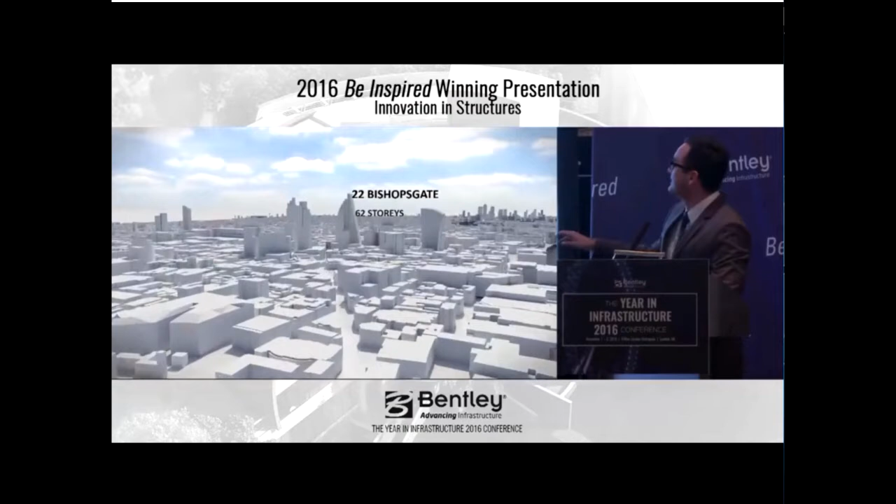Let's hope this works, it's a little video. So as we fly from Waterloo Bridge to the City of London, that gap between the Gherkin and the Heron Tower, between the Cheese Grater as well, that is where Bishopsgate is going to be.

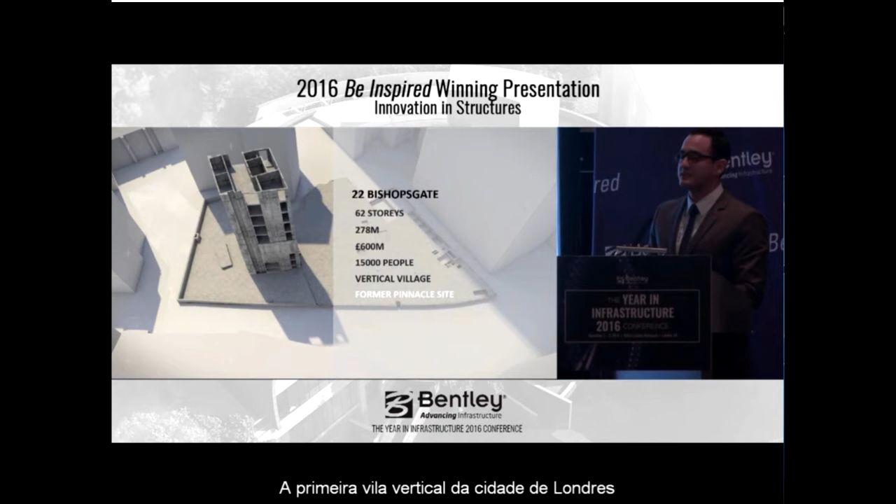It's a 62-story building, it's going to be 278 meters. The cost of the project is £600 million, and it's going to host 15,000 people. It's possibly the first of its kind in being a vertical village in the City of London, providing shopping space, amenity spaces, and office spaces as well.

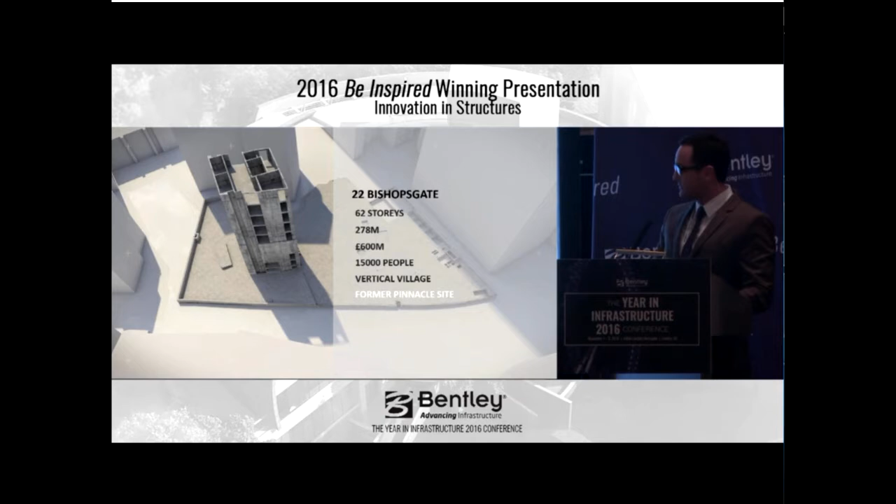The interesting thing about this project was that it is going to be built on the site of a previous building, the Pinnacle. Before that, we had 38 Bishopsgate, a building that was affected by one of the bombs a few decades ago, a terrorist attack. On that site, the Pinnacle was going to be built. This was before the recession in 2008, 2009, and the building, unfortunately, was only built up to level 7, the core of the building. I say unfortunately because I think, personally, that it was a beautiful design.

And now it's going to be replaced by another fantastic design, this time much more efficient, much more true and honest to the current economical situation.

What were the challenges? Well, the site constraints, as you can see, is in the middle of many, many towers. The City of London has very stringent and demanding planning requirements as well. Program constraints, everyone wants to build the towers as soon as possible. But also, unfortunately, the Pinnacle wasn't built, but also, unfortunately, it was built, because we were left with 3 stories of basement in the ground that we had to reuse for a completely different building.

A foundation built like this, and a building like that. So our challenge was trying to marry the superstructure, which didn't correspond to where the foundations were. So we had existing Pinnacle basement, existing Pinnacle foundations, and pre-existing Pinnacle foundations as well. And of course, we had to always provide a super efficient design, regardless of all the constraints. So I would like to take you through all of the elements of the building, and hopefully we'll get a glimpse of what the challenges were as well, and how we used Bentley software to overcome these.

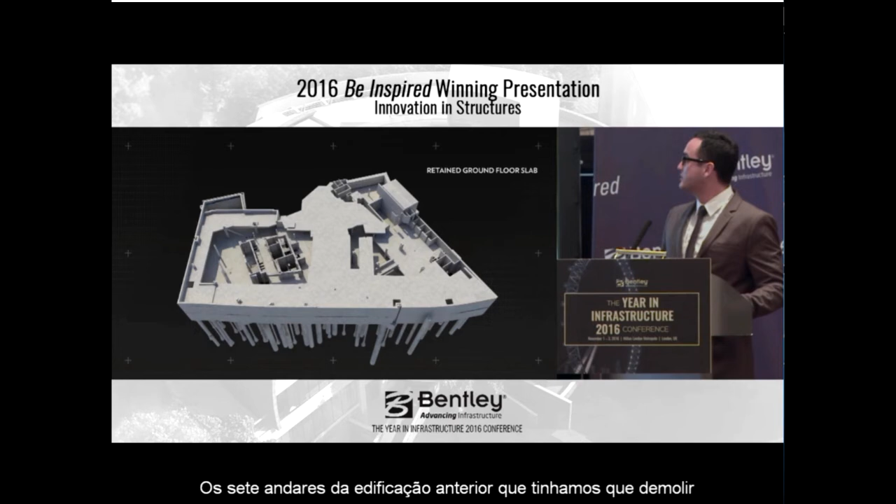So that is the existing site. I'll talk you through demolition and enabling works. What you see there is the stump, nicknamed the stump, the 7 stories of the previous building which we had to demolish. At the same time, we had to demolish partially some of the existing basement, levels B1 and B2.

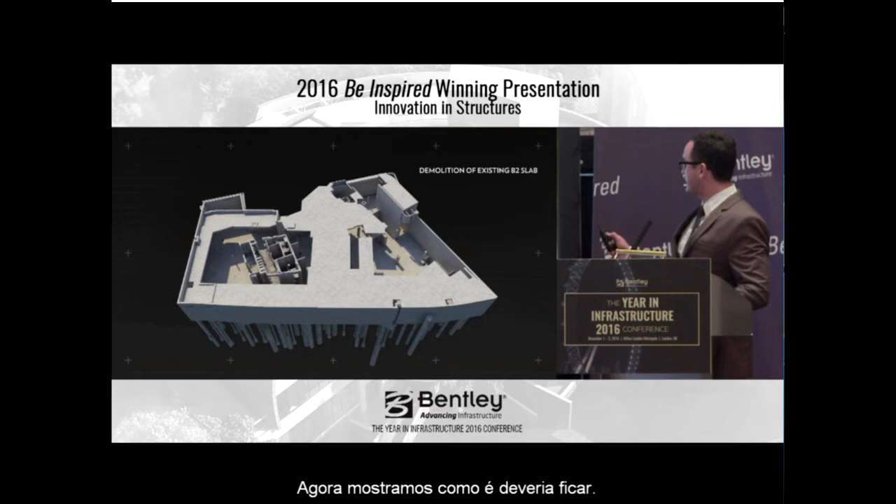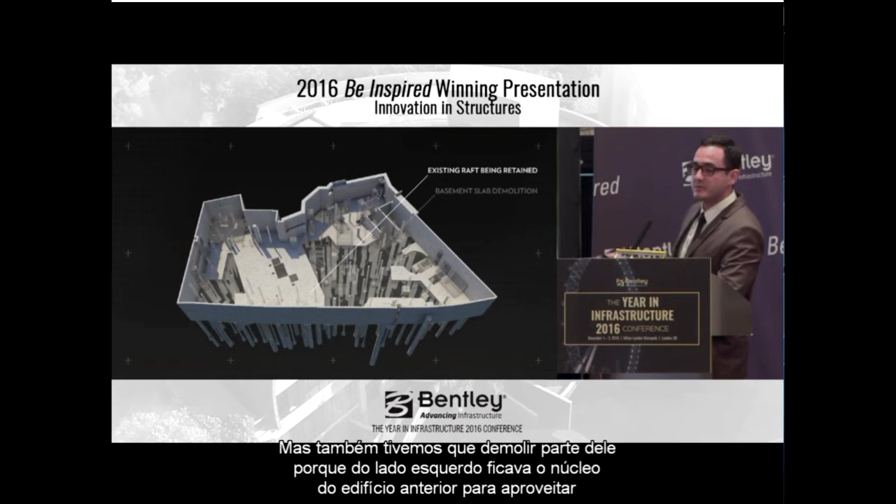Now I'll show you what the basement looks like without any of the slabs. So that is level B3, but also we had to demolish part of it, because on the left-hand side is where the core for the previous building would have gone. Now this building is much bigger, the footprint of the core is also much larger, so we had to provide additional foundation capacity on the right-hand side as well. If we spin this around, you'll see what the foundation looks like.

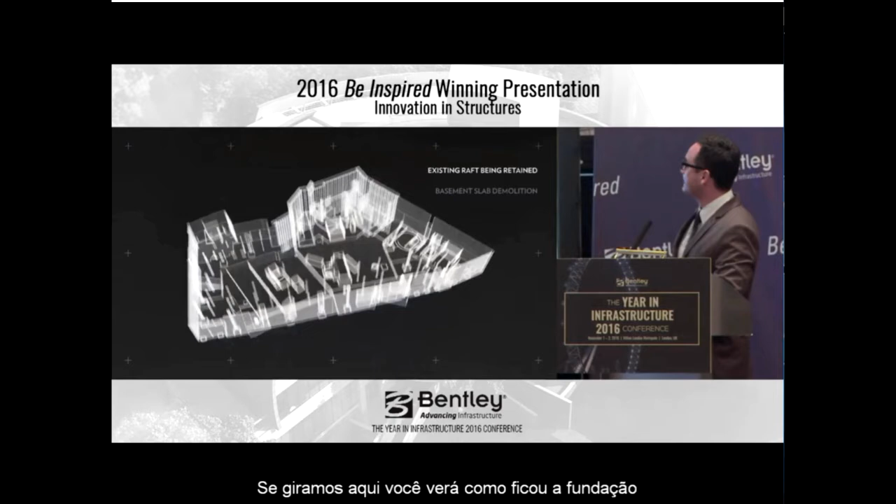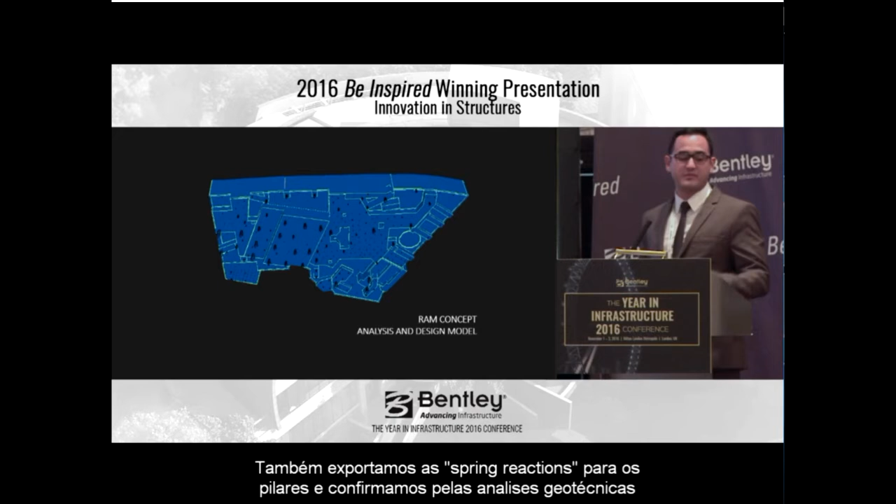So that's what it looks like. All the elements in grey are existing, and all the elements in blue are new. To analyze this interaction, we used RAM Concept, and we modeled all of the elements, existing and new, which is very complicated geometry. We also exported all the spring reactions for the piles from the geotechnical analysis, and tried to make them both compatible and interpret how the foundation was going to work. So I'll show you what the foundations actually look like.

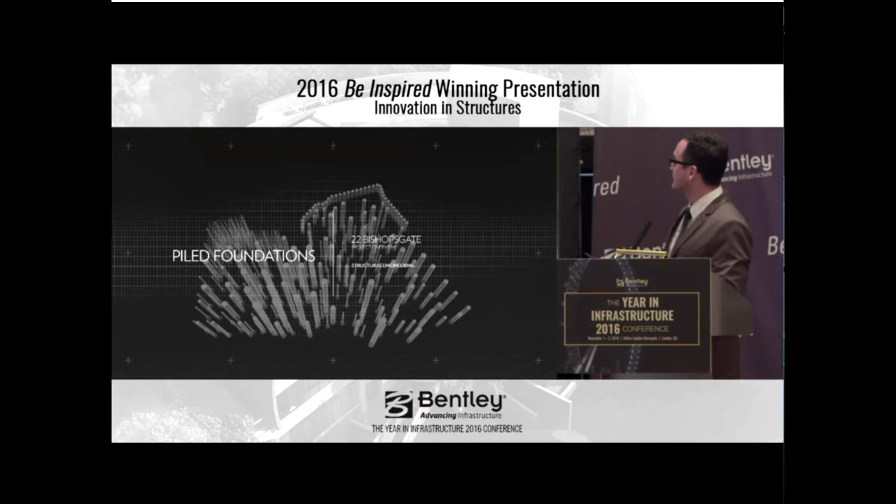Before they built the pinnacle, you can see all of the piles highlighted in blue, which are underlying piles supporting the inside the clay. These were for the previous building, 38 Bishopsgate.

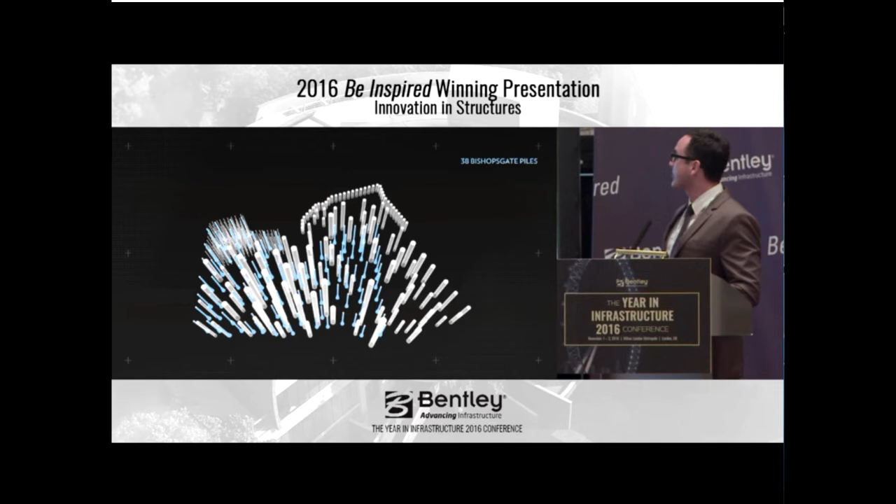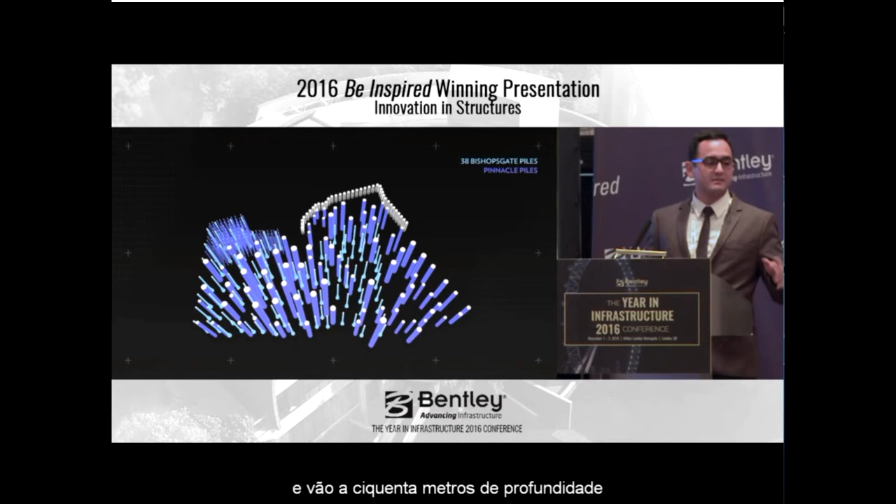When they started to construct the pinnacle, they built the new piles in dark blue or purple. Some of these piles are 2.5 meters in diameter and go 50 meters deep into the strongest strata, which is the Thanet Sands.

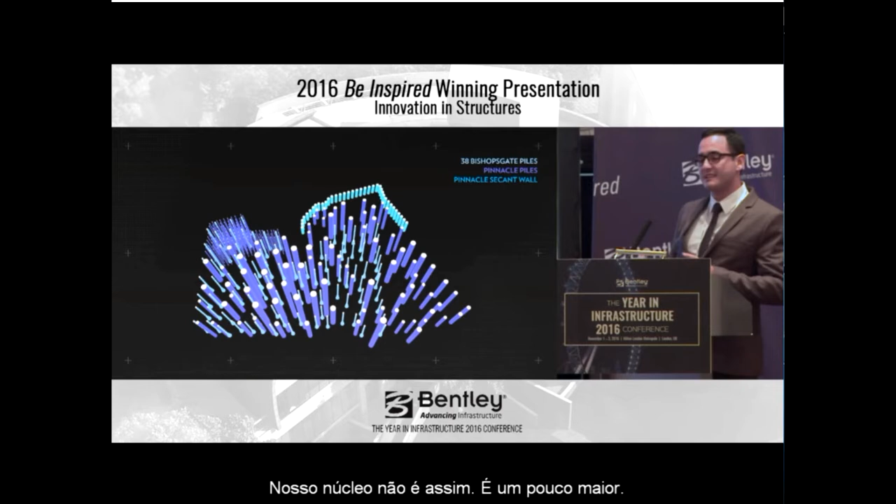As you can see, there's a concentration of piles on the left-hand side. That is where the core was going to be for the previous building. Our core is slightly different, it's a little bit bigger. The size of our core, overlaid there, corresponds actually not to the stability requirements of the building, but...

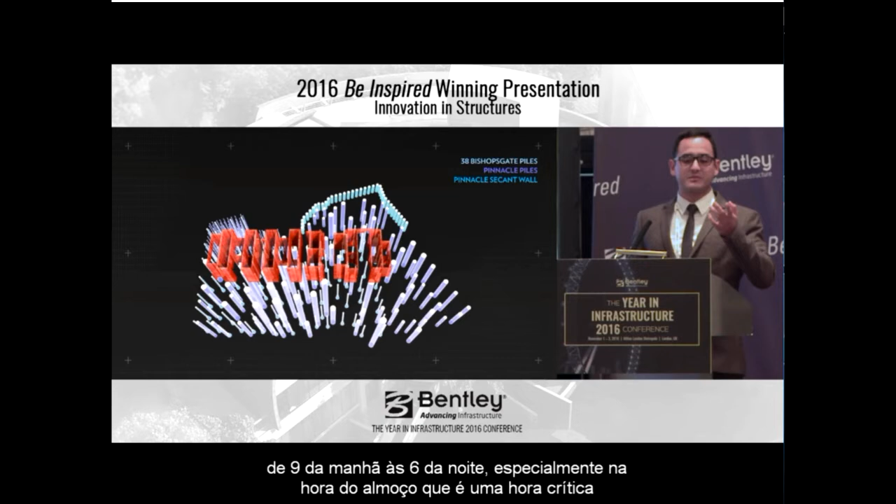...the number of lifts required to mobilize 15,000 people up and down, up at 8 in the morning or 9, and down at 6 p.m., but especially at lunchtime. That is the critical time.

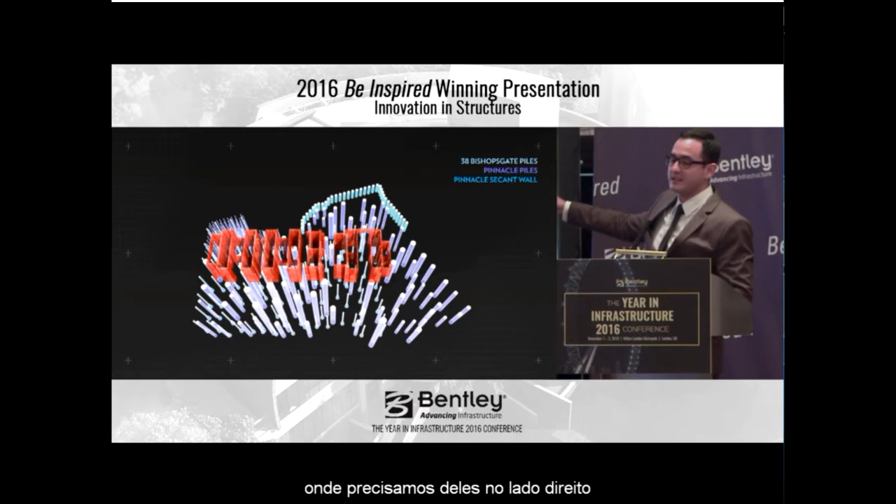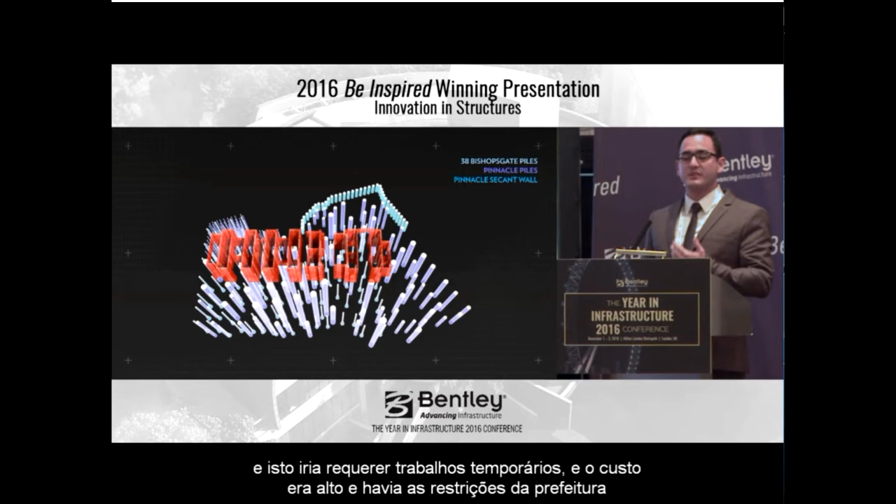So how did we manage to provide additional foundation capacity? The idea originally was to create or build 16 new 2.4 meter diameter piles where we required them on the right-hand side. But to do this, we would have required a rig from ground floor, drilling through 3 stories of basement, and then 50 meters into the sand, through the clay, to the sand. And that required temporary works, the cost was large, and there were also program implications.

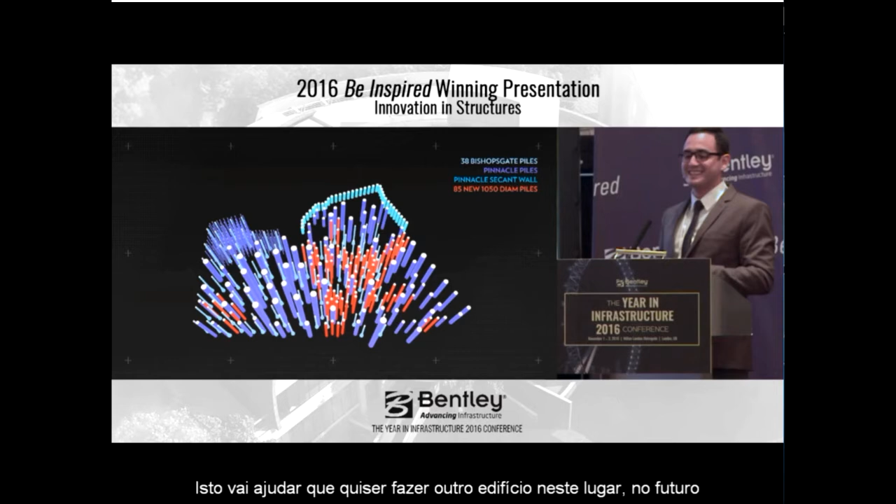So if someone wants to build a building here in the future, they'll just find a massive lump of concrete there. So let's spin this around.

I'll show you what it looks like from the side. Those are the depths of the big piles. Our piles, the 85, couldn't be as deep as the 51, so they could only go 25 meters into the soil, because if they were 26 meters or more, they would go into the gravel, into the saturated strata, and it would require bentonite to be poured inside the pile to stop the water from coming in. So there were so many factors limiting the depth and the position of these piles.

Let's move in a bit higher into the building. As I mentioned earlier, the building footprint corresponds to a different design, and the foundations didn't match this, so we had to transfer all of the loads somewhere. Where else would be better than the basement? Which is a shame, because no one's going to ever see these big transfer structures, because they're all buried.

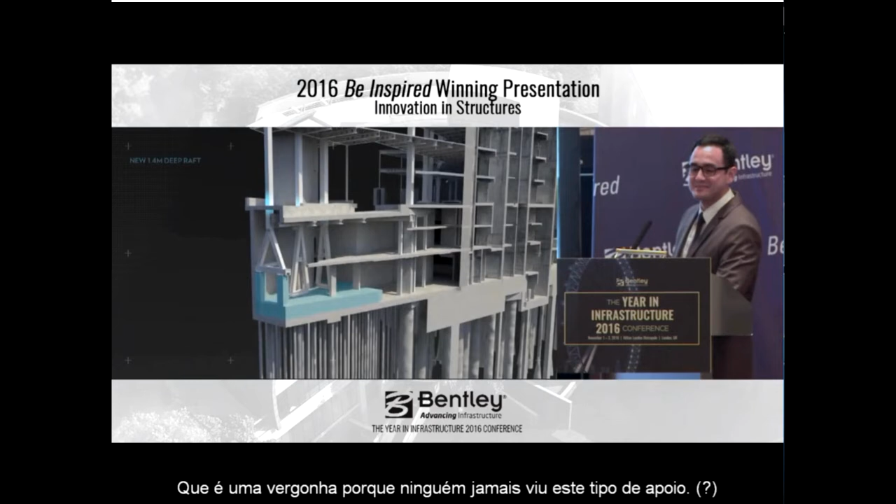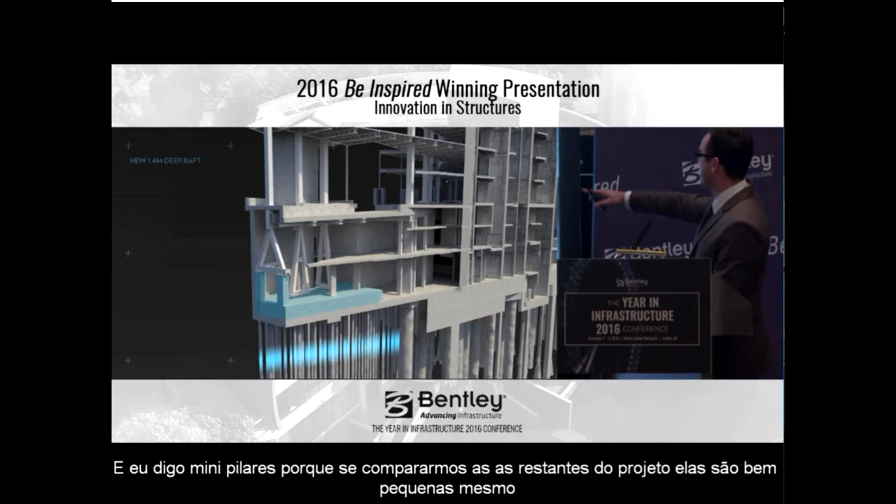What happened here was we had 3 big columns, 60 stories on the left-hand side, and we had already existing mini piles. I say mini piles, but they are 600 millimeters diameter, though compared to the scale of the rest of the project, they are mini piles.

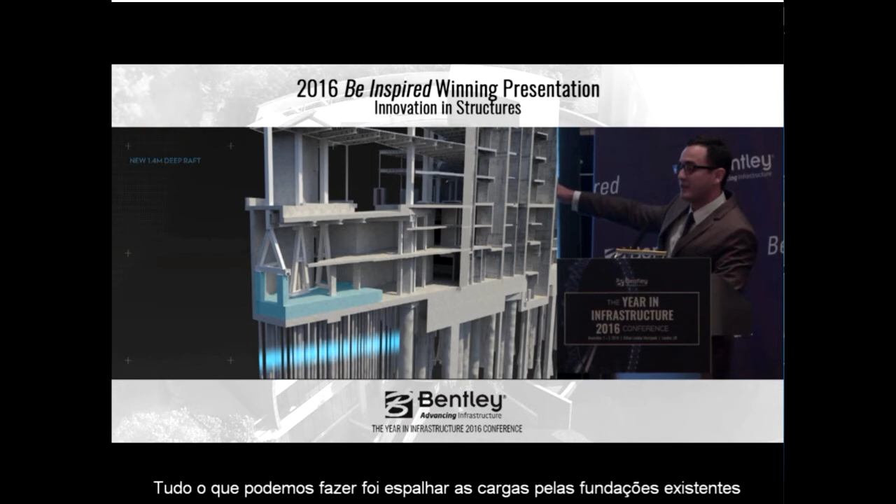So we couldn't really provide any additional foundation capacity on this side. All we could do is build a raft to try to spread the loads into existing foundations. But also, since the loads for these 3 columns were so large, the new raft was failing in punching shear through them, so we had to spread the loads using these A-frames.

They've just installed these A-frames. I haven't got a photo with me, but they look really, really, really great.

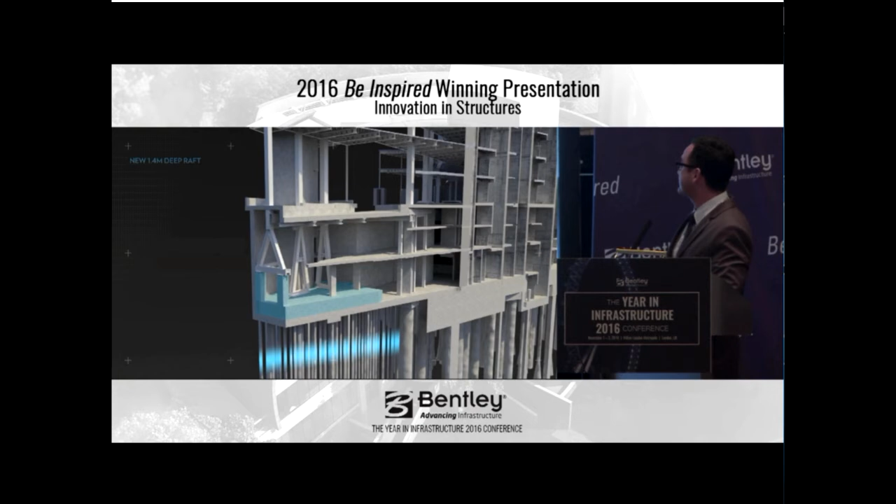On the south side of the building, because of the waste management strategy, we couldn't really have that column you see there going all the way down to the foundation, so we required the transfer structures. This is a 14 meter long beam, 3.5 meters deep, and it weighs 97 tons.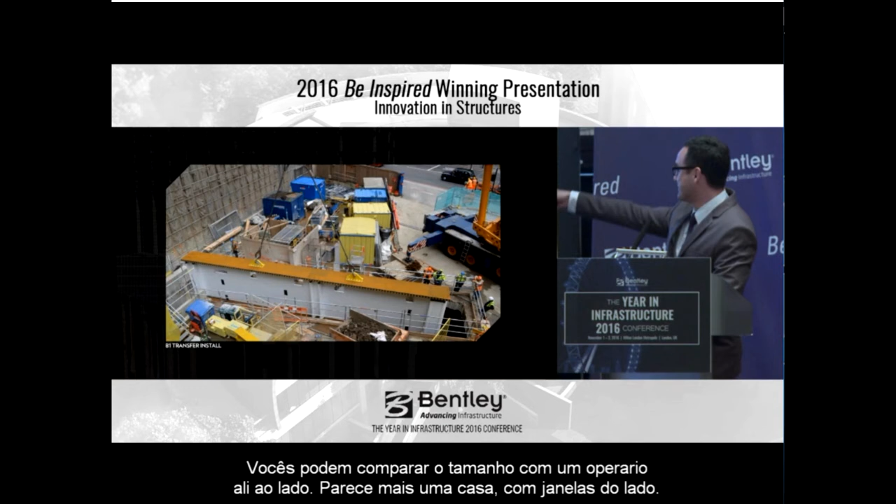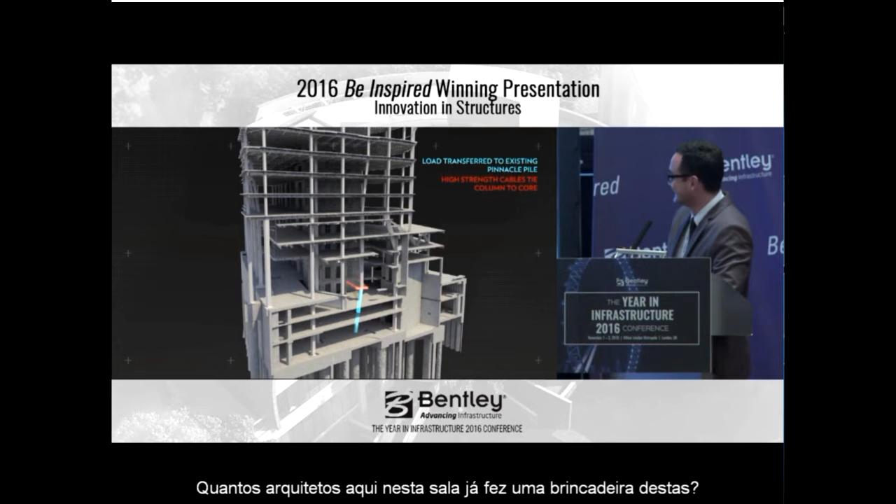Of course, why would you have a vertical column if you can have an inclined one? Are there any architects in the room? Because I always make a joke about architects.

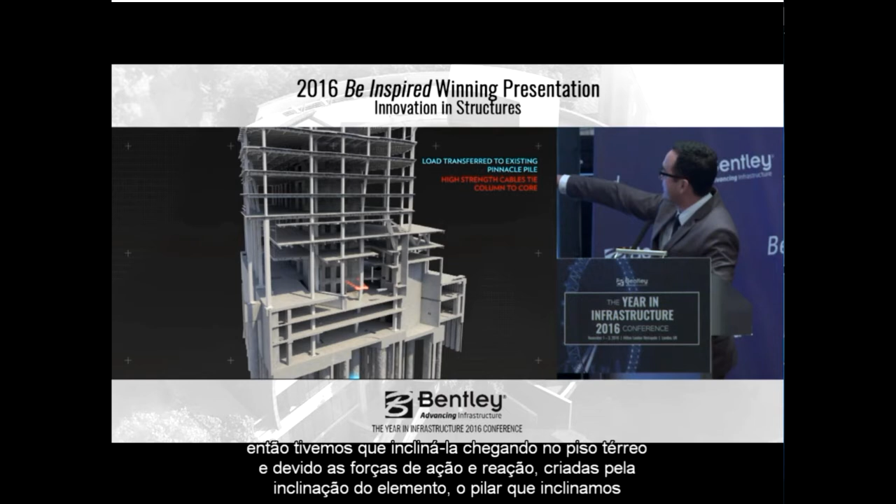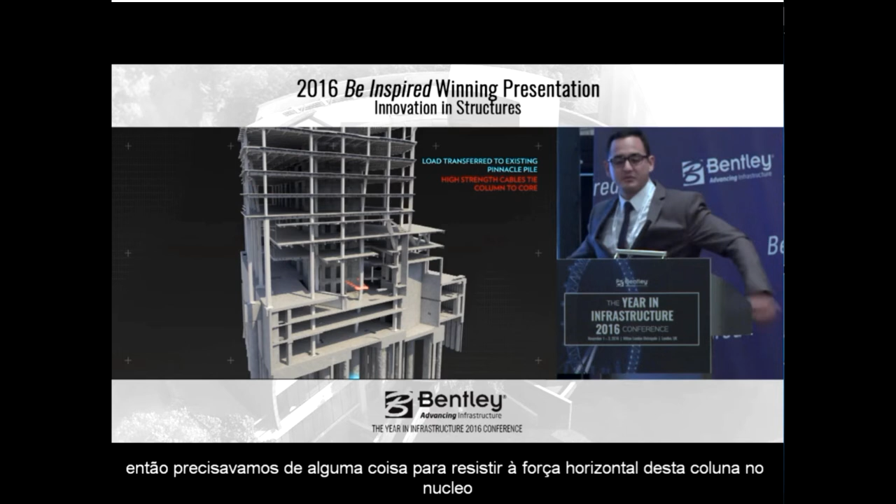We couldn't have this column vertical because of the waste management strategy at the base, so we had to incline it, crank it at ground floor. Because of the push and pull forces created by the inclination of an element, I was advised not to leave this unrestrained. If you're inclined, you try to move forward, so you need something to restrain you back. That's what these Macalloy bars are doing, restraining the column and resisting the horizontal forces back into the core. The force in this column is 60 stories, so it's like 60 or 70 meganewtons, which is gigantic.

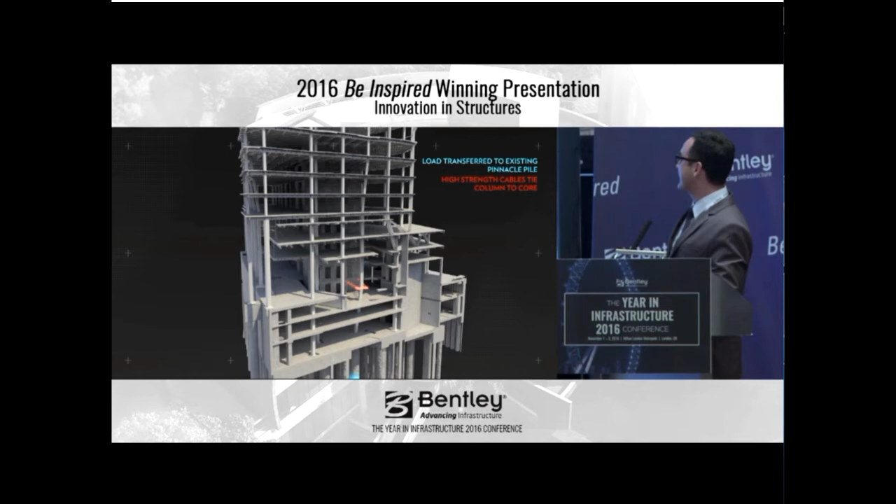Let's move on to concrete, which is what I like doing. Of course, we also had columns at a different position in the superstructure, and we didn't have the corresponding foundations in the substructure. So we had to transfer these gigantic loads using concrete walls all the way around.

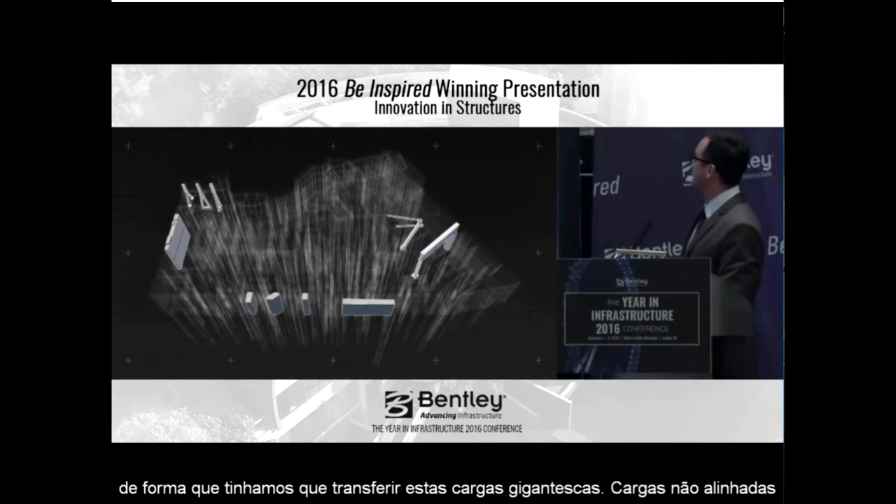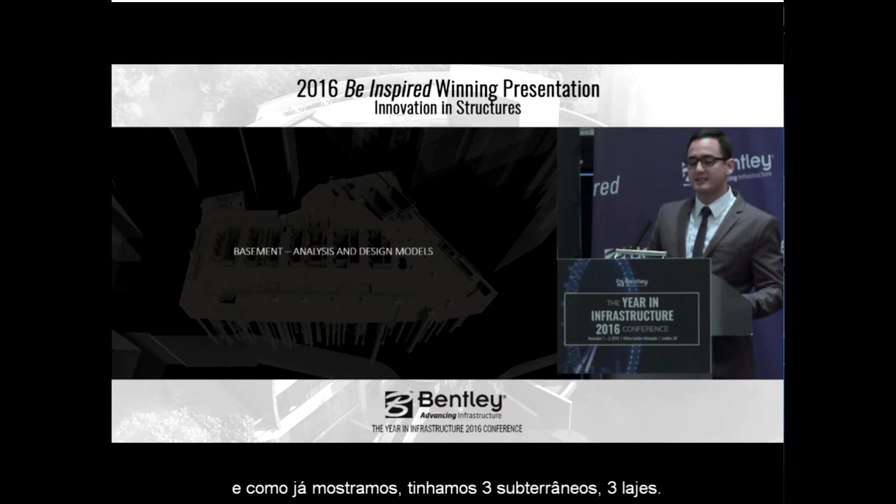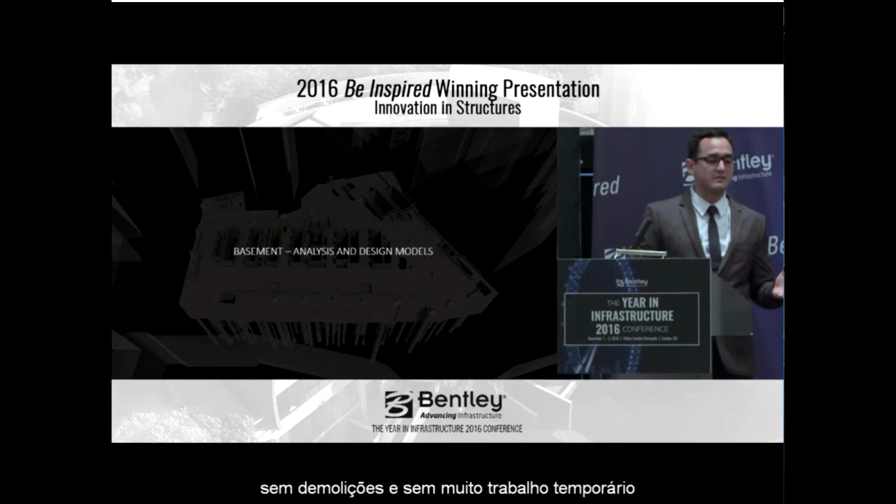For the analysis and modeling of the basements, we used RAM Concept as well. As you saw previously, we had 3 levels of basement, 3 slabs - B2, B1, and the ground floor - and we had to build around them and through them, trying to keep as much as possible of the existing foundations without demolishing and without using many temporary works. This is a small image of what the analysis models look like in the software - lots of openings, lots of penetrations for all the lifts, etc.

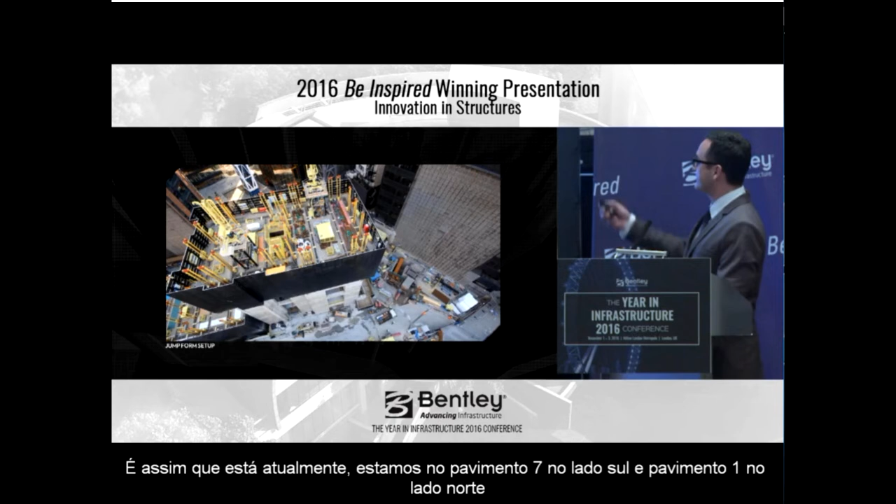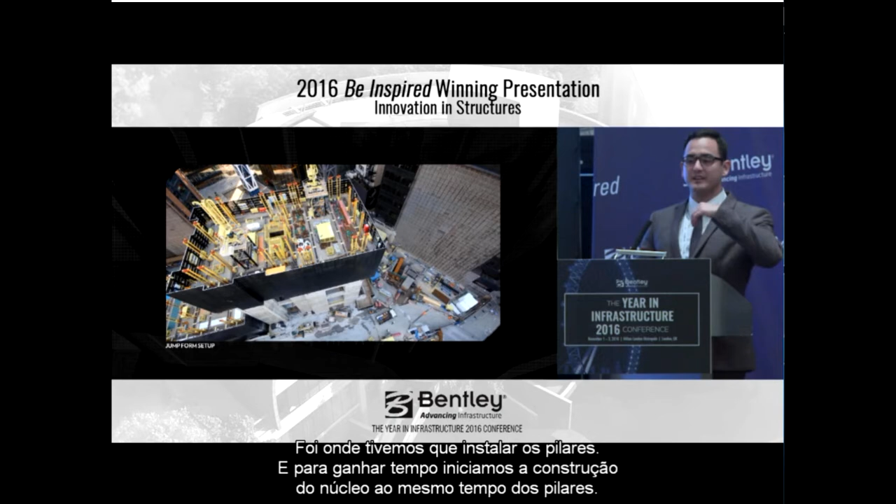That is what it looks like currently. We are on level 7 on one side and level 1 on the north side. The reason why the core is going at 2 different speeds is because on the left-hand side, we had an existing foundation, so we were able to dig up to basement 3 and start building the core from basement 3 and up, as you would expect a normal building to happen. But on the right-hand side, the south, we didn't - that's where we had to install the piles. And to save time building the piles, we started building the core at the same time as we built the piles.

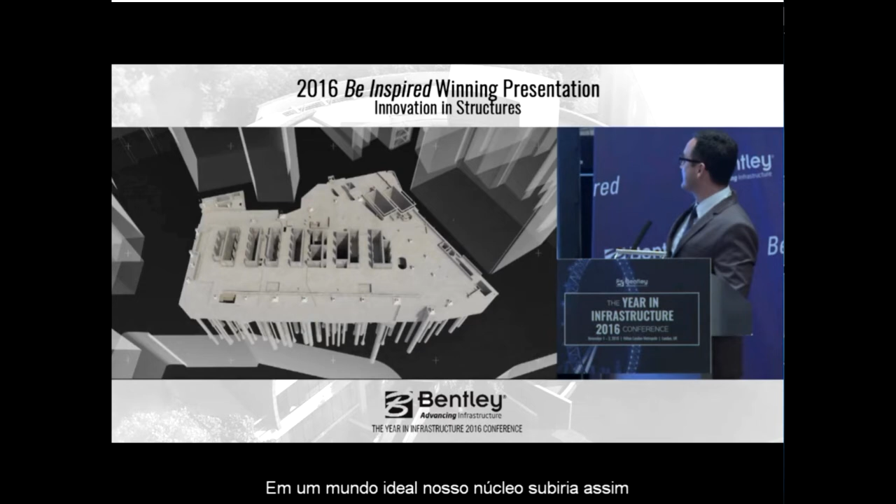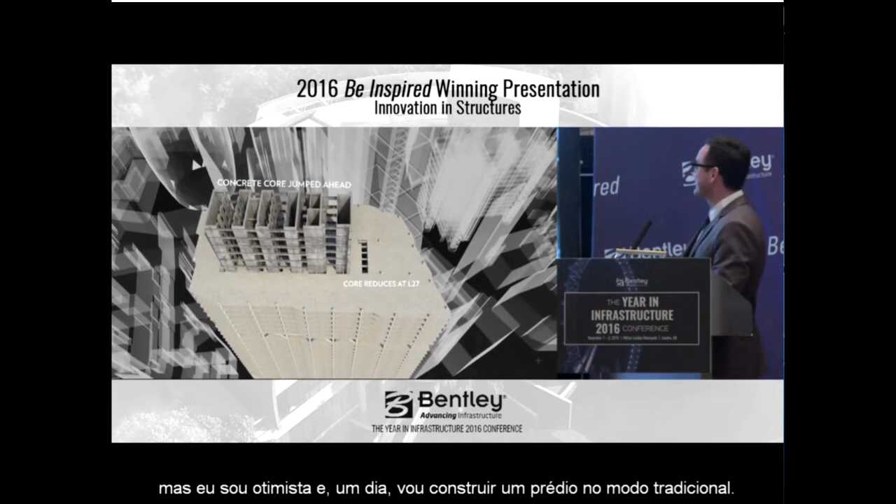Below that, there's a transfer structure, and there are no columns, so there are no foundations, but you are already building above ground floor. We're going to build up to 25 stories before we connect the foundations with the rest of the tower. That is why this is going higher and first. In an ideal world, a tower would go up in sequence, but in London, time and money constraints are sometimes so demanding that you can't really build the building traditionally - although I'm very optimistic. Hopefully one day I'll get to build a tower in the traditional way.

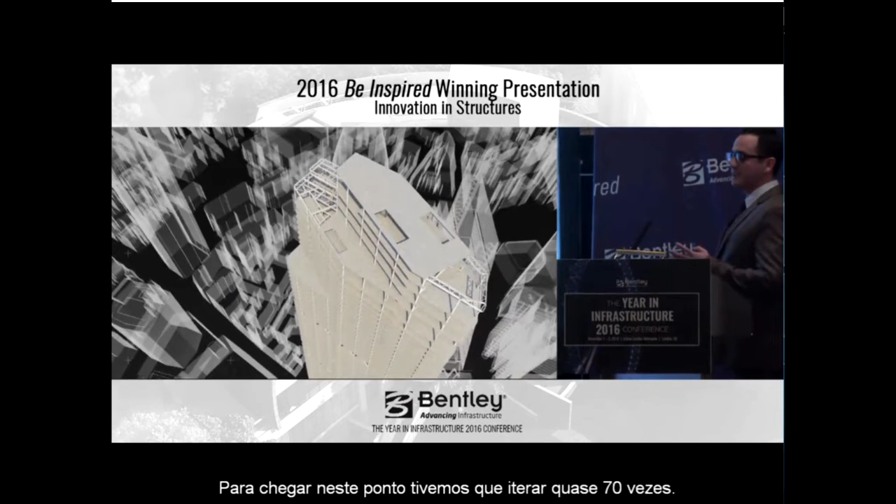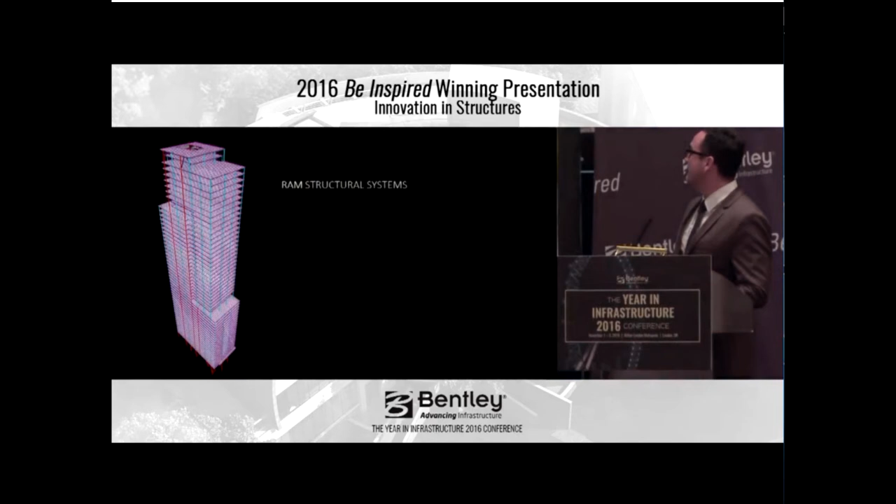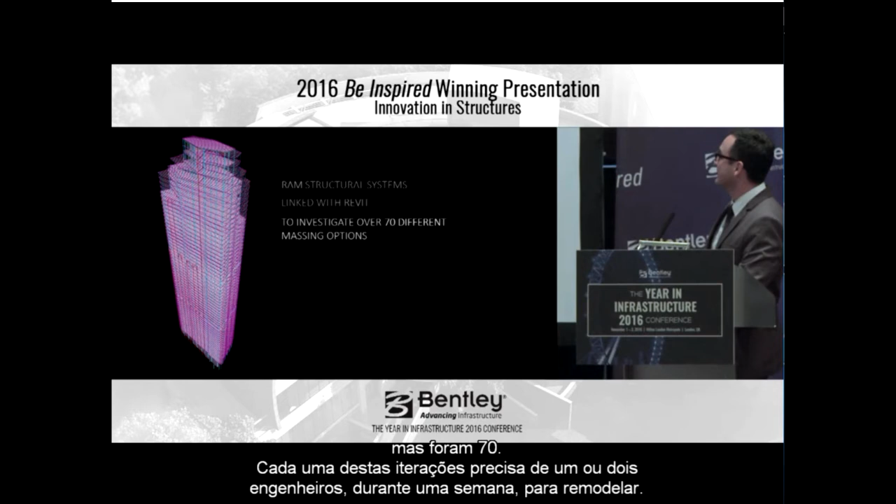But this shape is the result of a series of iterations. This is the final product. To get to this point, we had to iterate up to 70 times, and that's when we used Bentley, the integrated structural modeling. If I click on the next one, you look on the left-hand side, that is how the shape of the building evolved. I've only selected, I think, 10 or 12, but there were 70.

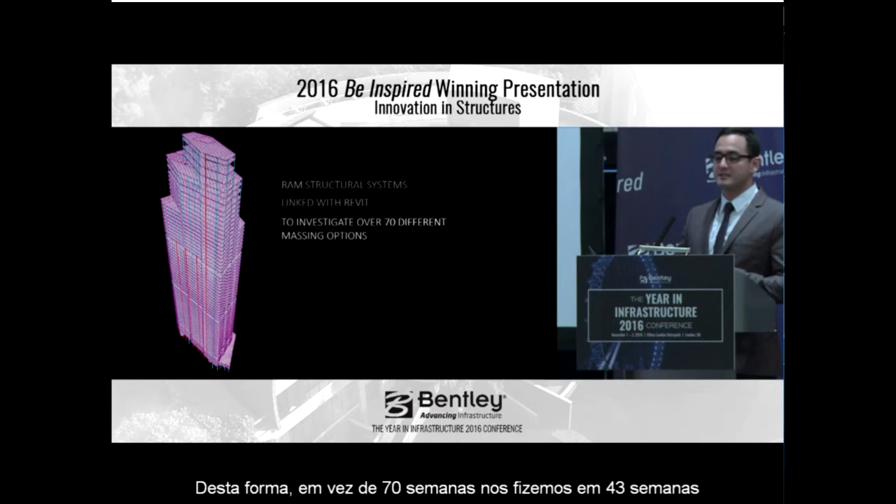Each of these iterations takes 1 or 2 engineers for a week to remodel. We used Revit integrated with Bentley and RAM structural systems, so that we could produce drawings at the same time as we modeled the building seamlessly. By doing this, instead of doing it in 70 weeks, we did it in 43 weeks - we saved nearly 40% of time in engineering and modeling time.

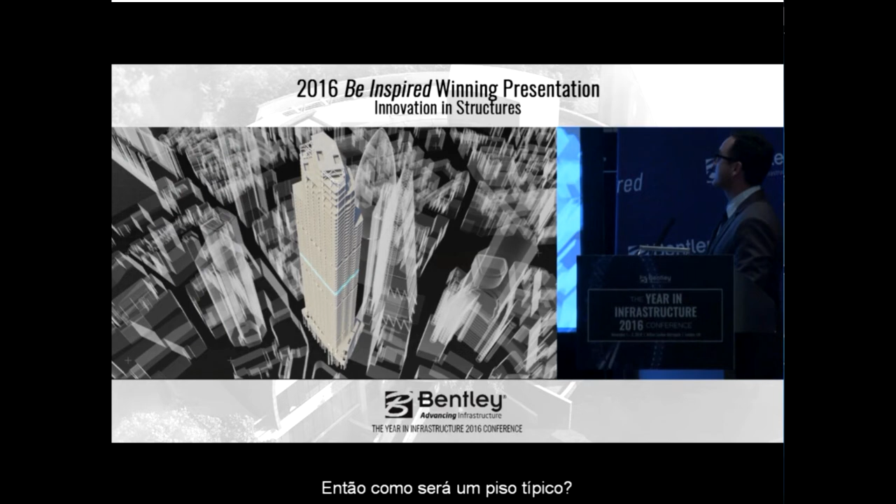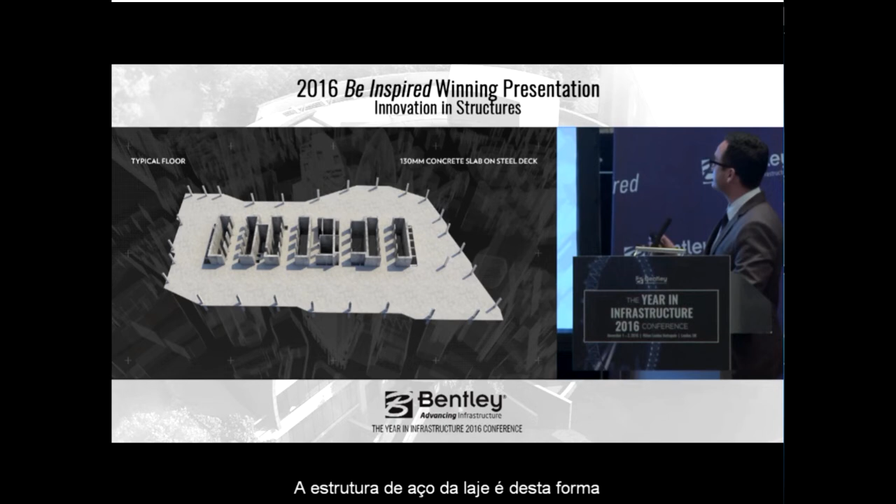So what does a typical floor look like? As you can see, the size of the core is very large below level 25. It's a typical 130 millimeter lightweight concrete slab. That is what the steel frame looks like, and the steel floor and steel frame were analyzed using RAM structural systems.

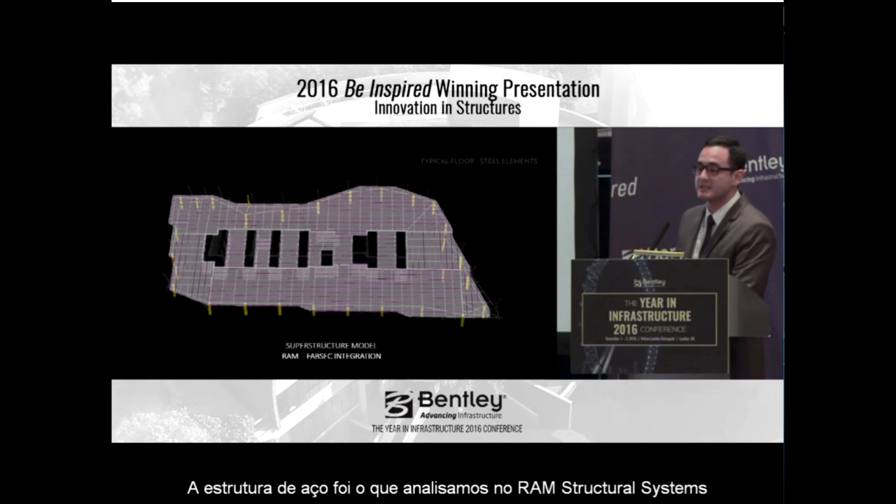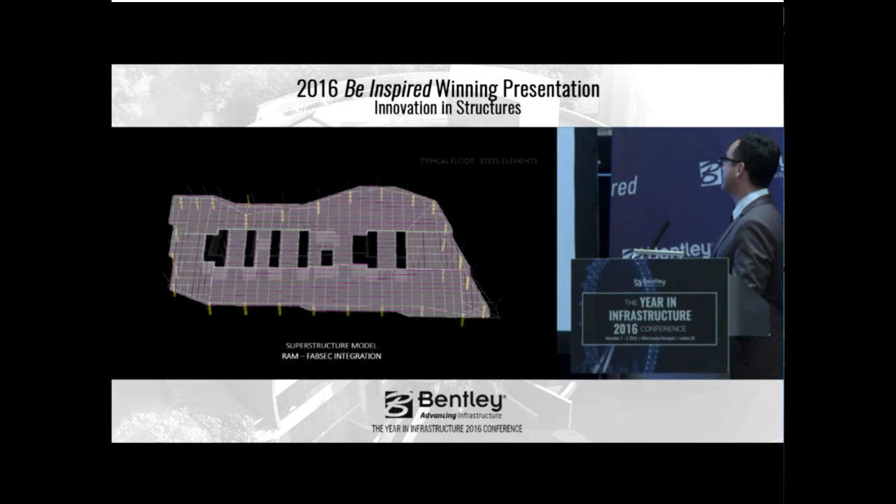At some point during the design of the project, it was requested to change all the elements to FabSec. So we integrated RAM with FabSec to export all the sections and design them in FabSec, design all the openings and all the stiffeners very, very quickly and easily. Our client is sometimes quite demanding, so they require constant changes, and that just works really, really seamlessly.

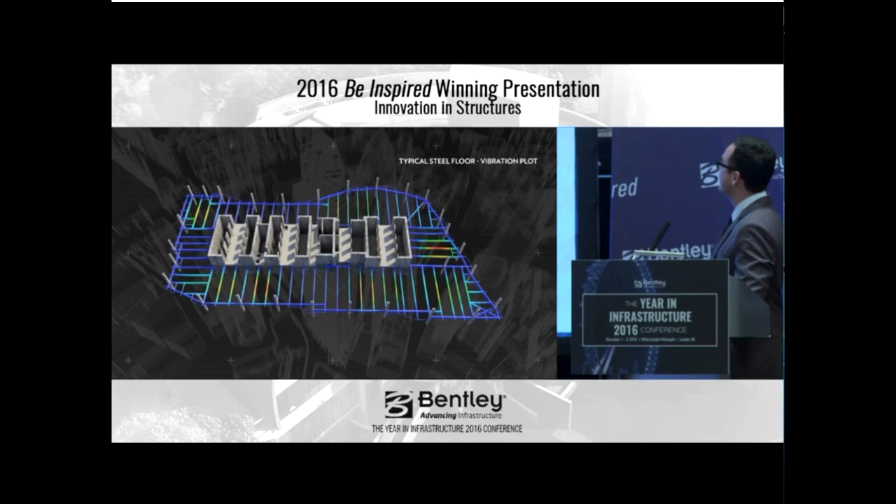As part of any standard office building, we carry out a floor vibration plot. You can see the areas where the vibration is maximized. And we also carried out a fire assessment.

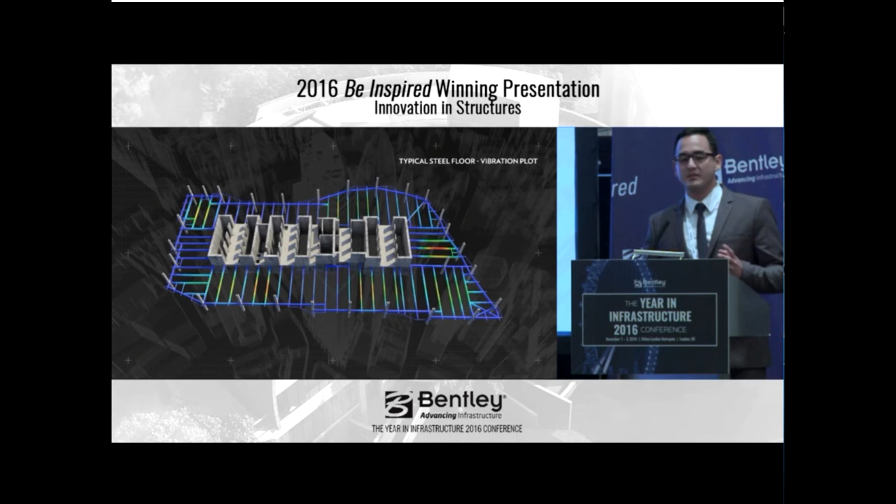The way we analyze fire is by replicating the effects of fire and seeing which elements start failing first, and that way we can determine which beams to fire protect and for what length of time. Instead of specifying that all of the beams have to be protected for 90 minutes, some don't need any fire protection, some need 30 minutes, some need 90 minutes, and that way we save a lot of money in fire protection.

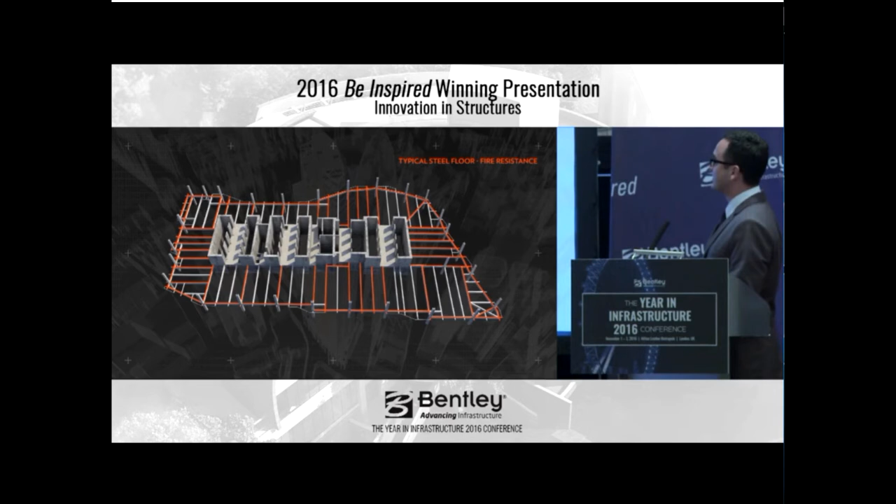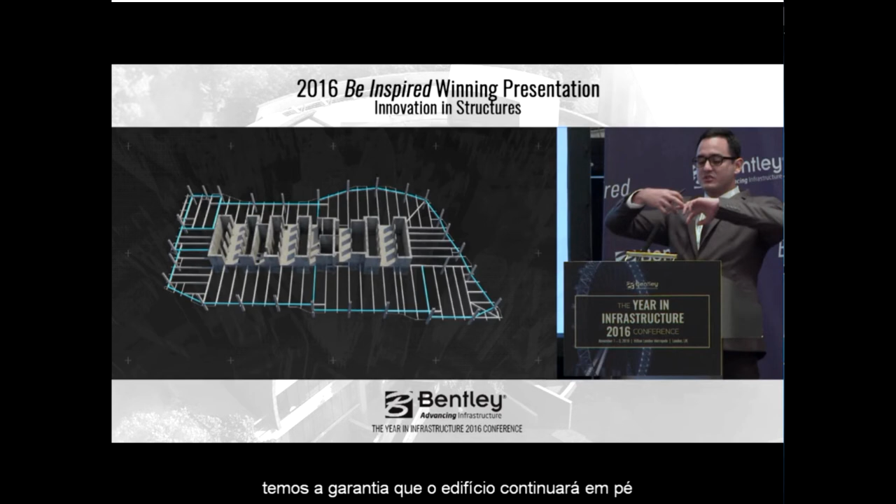And finally, in the floor, for a typical floor, robustness and disproportionate collapse. This is a very, very important part of the design of every building. You need to provide an alternative way of load path, alternative redundancy. So in this case, we have a tie around, all of the elements are tied around the building so that in case of one of the columns failing, the catenary action between the other two makes sure that the building stands up with large deformations, yes, but it remains standing up in the case of one of the columns failing.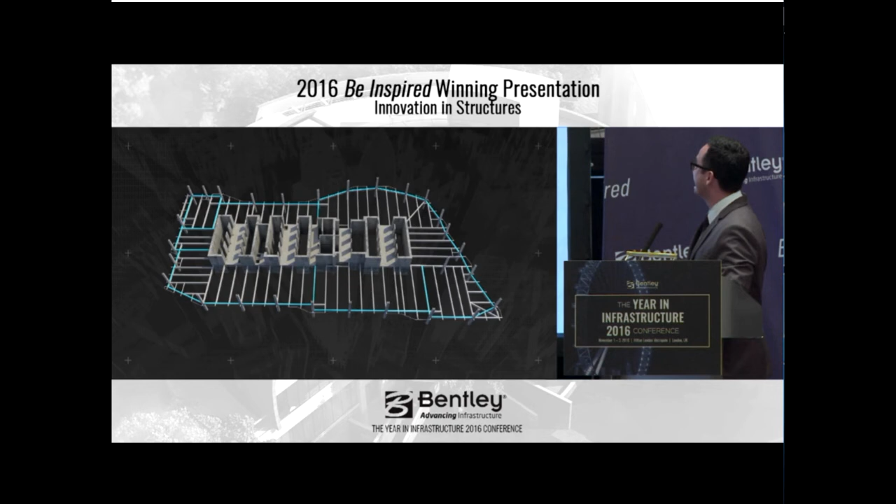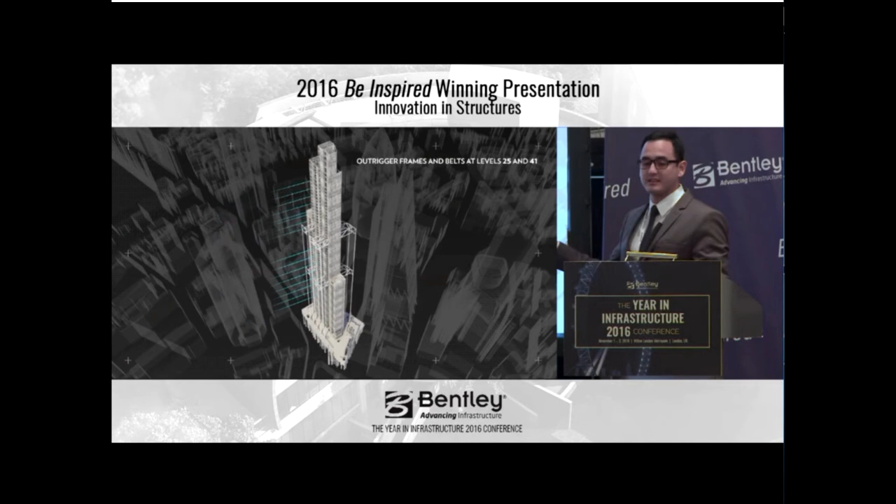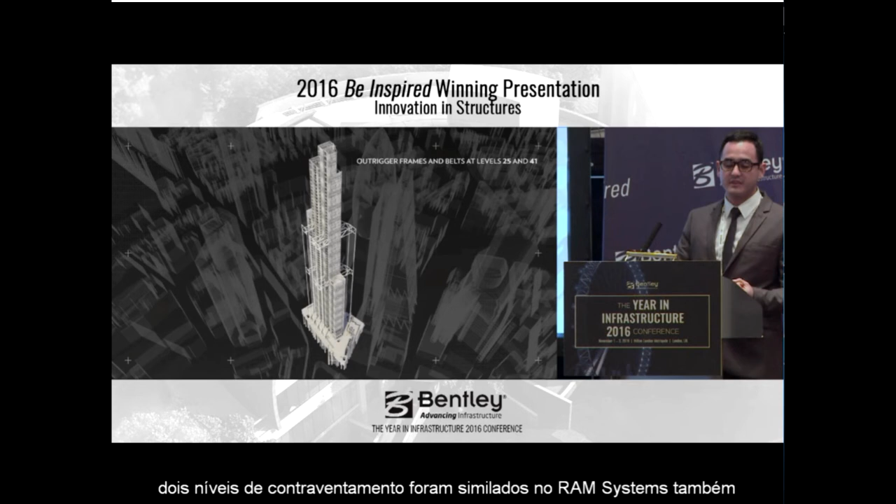Lateral stability, a very important part of the design of a tower. In this case, the lateral stability system resistance is provided in one direction by the size of the core. This is in this direction. And in the opposite direction, because of the slenderness of the core, we required an outrigger system, 2 levels of outriggers with outrigger belts. They were modeled using a combination of different software, including RAM structural systems as well.

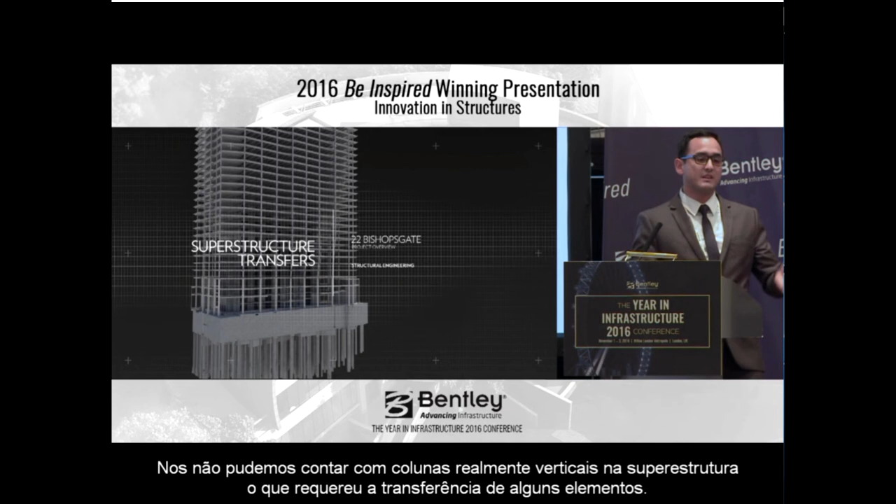Just to get to the end of the presentation, we had transfers in the basement, but also we couldn't really have straight vertical columns in the superstructure, so we required some elements to be transferred. There they are, you can see some of these inclined columns as well. So 50 stories above, and then they incline.

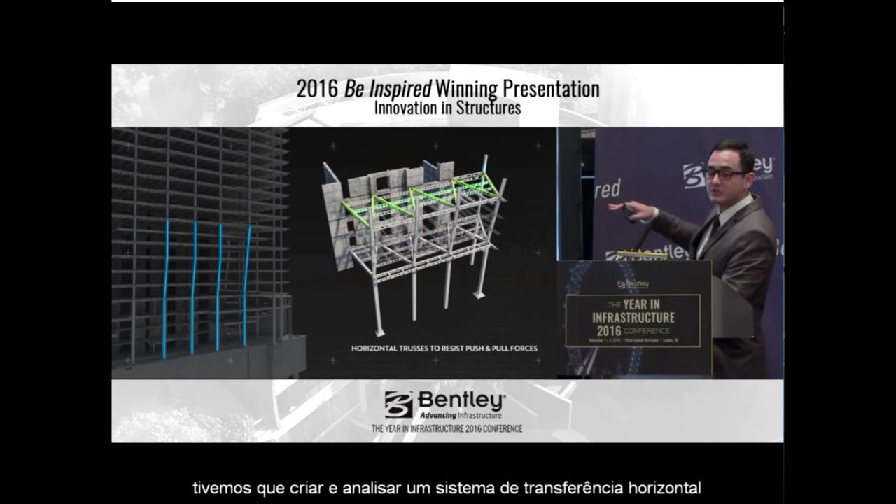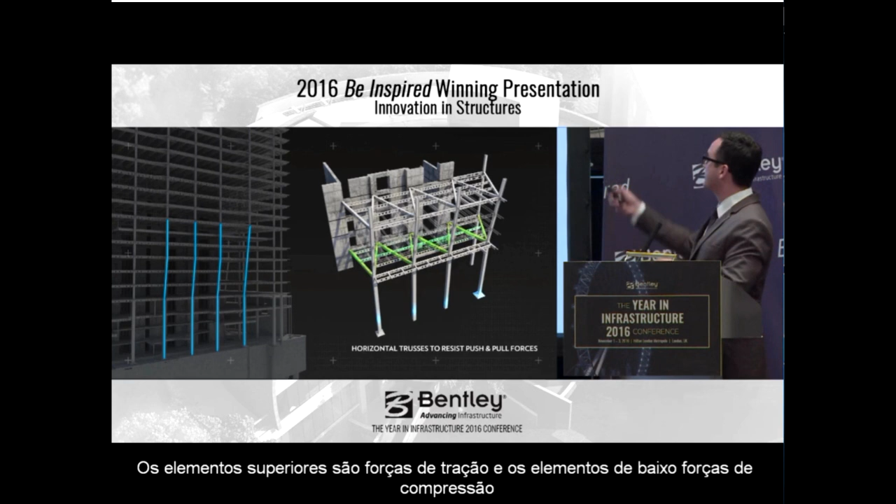To resist these very large lateral forces generated by the inclination, we had to create, analyze and design a horizontal transfer system. We saw that in the basement, the inclined column was tied back to the core. But here we couldn't really do that, because if we used high-strength bars to tie back into the core, they would interfere with the services running through all of these openings. So we had to make the floor plate behave horizontally to take all these forces. It wasn't enough to take the forces back into the concrete slab, we had to engage the steelwork as well. The top elements resist the tension forces being pulled, and the bottom elements resist the compression forces, which in the case of steel is more onerous.

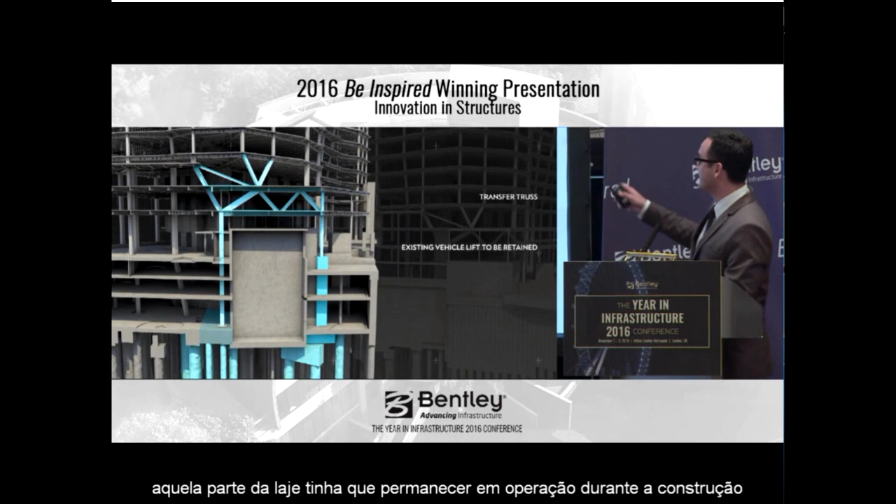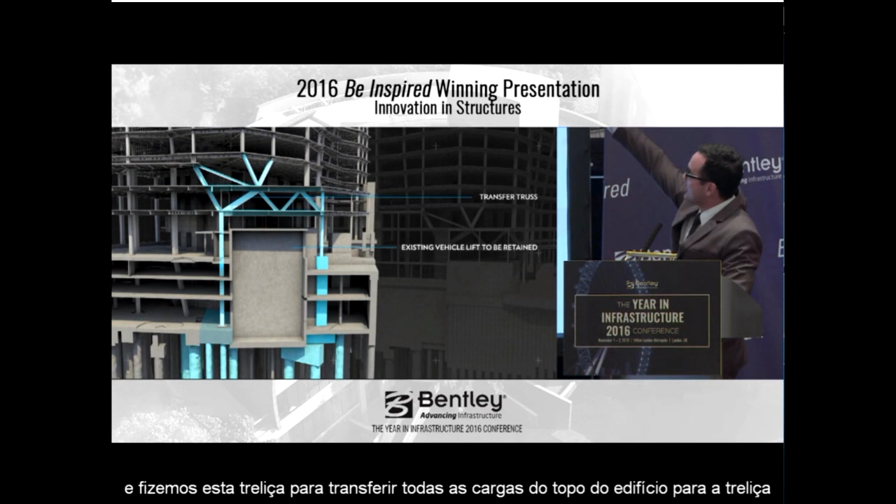On the right-hand side, that part of the basement had to remain in operation during construction, so the 3 columns at the top couldn't really go down to the foundations, and we had to model this beautiful truss, called the Rhino truss, to transfer all the loads from the top of the building into the truss, into two new columns, into new concrete elements, and into new piles at the base.

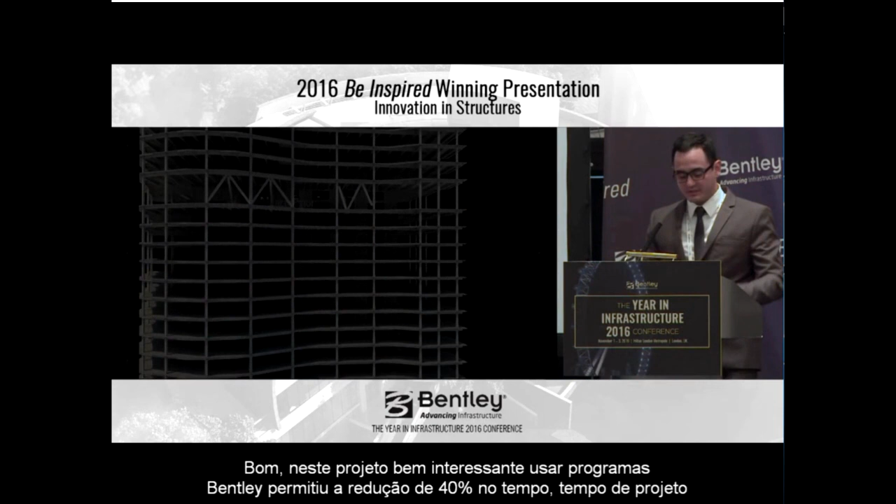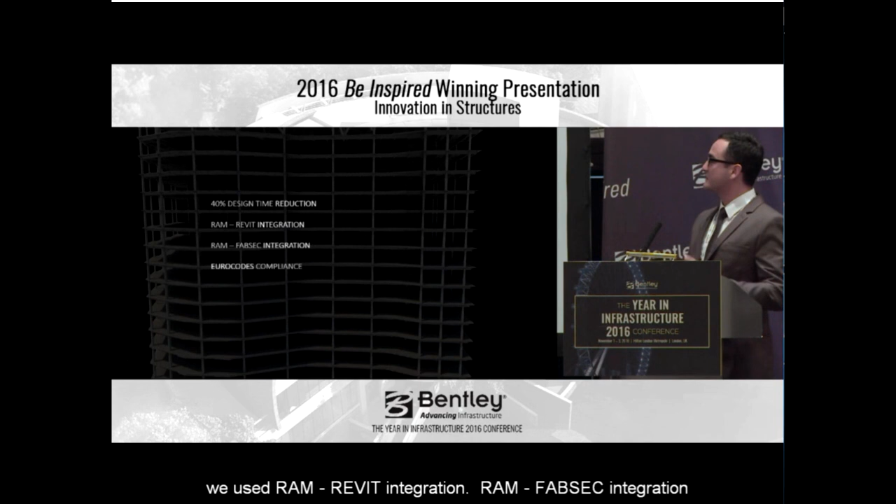So 22 Bishopsgate has been a very interesting project. Using the Bentley systems allowed us to save 40% of the design time. We used the RAM and Revit integration, RAM FabSec integration, and all of this with Eurocode compliance, which facilitated the process and made it much simpler.

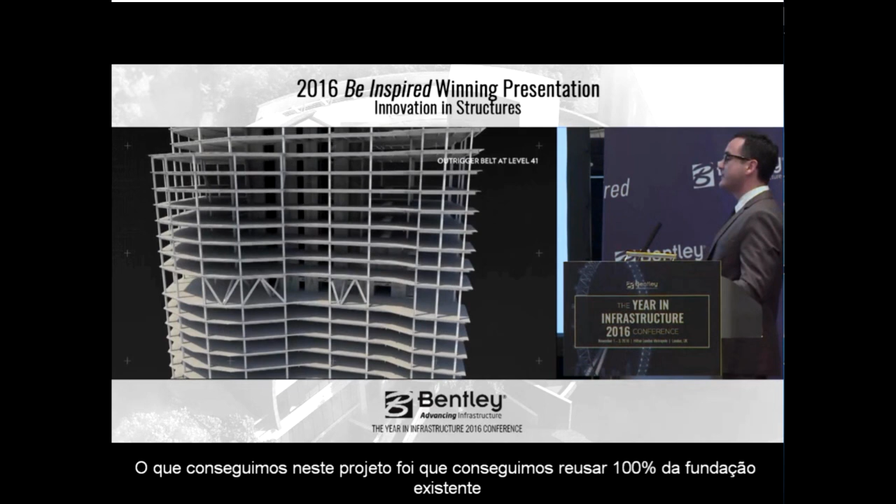Some of the achievements of this project: we managed to reuse 100% of the existing foundations, and we added some extra capacity. We reused 50% of the existing basement. We were successful in providing an efficient design, and we provided 30% more floor space in 22 Bishopsgate than the previous scheme, which I think is a really, really good bonus.

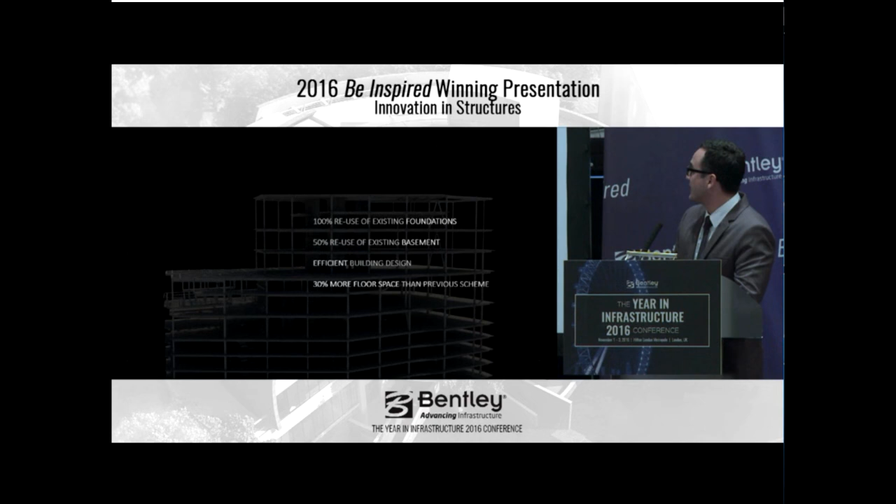Hopefully when it's finished and you get a chance to come back to London, it will have a nice restaurant at the top and also the tallest observatory public space gallery in the city. Thank you very much.